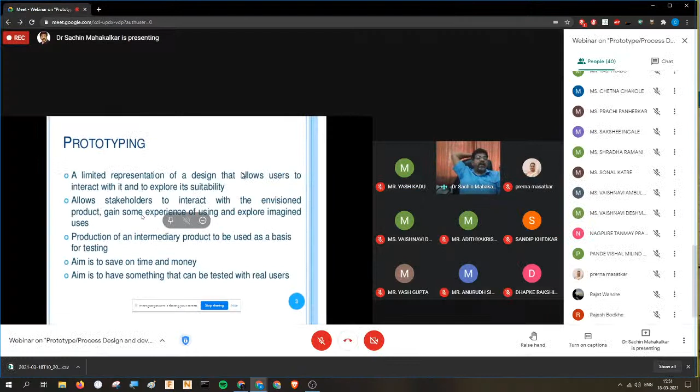Nowadays every part, even a small part directly related to inertia forces, is given an aerodynamic shape. Even the mirror, if you notice, is aerodynamic, so that it reduces inertia forces, and that's how you increase the mileage.

Nowadays only the chassis uses steel. For most other components, plastics or composite materials are used, which are very light in weight. When we use this type of material, it becomes much easier to give the aesthetic look.

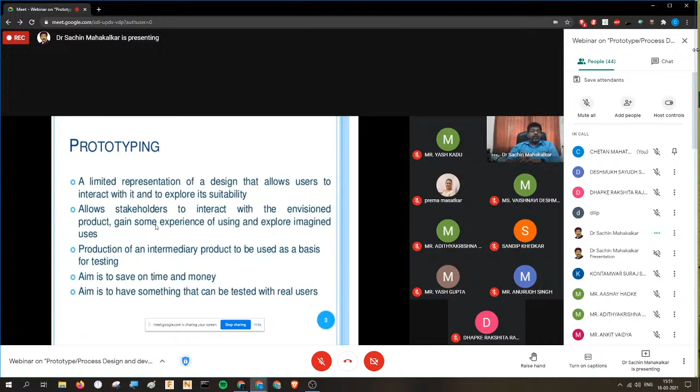That's why you find all these aerodynamic shapes being given, and new models can easily be launched one after another just by changing the aesthetic looks while the engine remains the same. So the aim is to have something that can be tested with real users - this is nothing but prototyping, as all of you know.

Now, what do you mean by prototyping? Everyone knows that wherever you go for testing, that is prototyping. You never get it right the first time. Any idea that comes up, when converted into a 3D model, will have many errors, so it will never be right at the first attempt - there will always be redesigning required.

So basically, in prototyping, you have design, then you come to the prototype, and once you go to the prototype, you evaluate it. At the evaluation stage, if feedback comes in, you go back to redesigning, then back to the prototype, and that's how your product gets a new improved version. If it's okay, the prototype can be converted into a real model which can be launched in the market.

So again, what is a prototype? It is the working model or first trial version of a new design to be tested. Feedback is very important - without feedback, you cannot say it is 100% a working model.

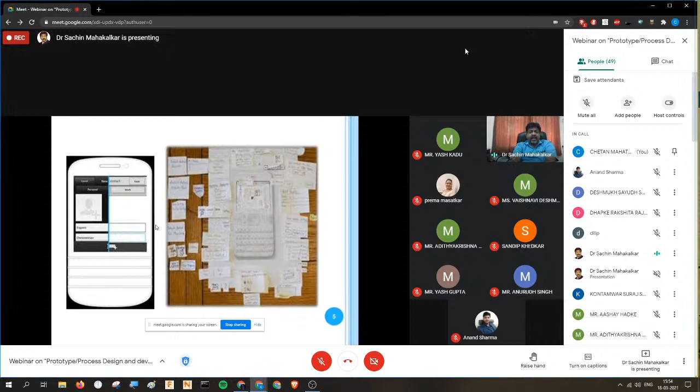What do you mean by prototype? Going into detail about types of prototypes and designing steps, in the further slides I'll cover the applications and manufacturing techniques which we will be using to prepare a prototype of a model.

So what is a prototype? In interaction design, it can be any of the following: a series of screen sketches, a storyboard that is a cartoon-like series of scenes, a PowerPoint slideshow, a video simulating the use of a system, or a piece of software with limited functionality written in the target language or another language.

Or it can be a product design, it can be any product like a small bottle, or in a pandemic, so many products related to the healthcare system.

All of you are aware that in many NITs, IITs, and institutes like YCCE, we have developed using 3D printers some valves, or maybe some components associated with ventilators, or some other healthcare systems.

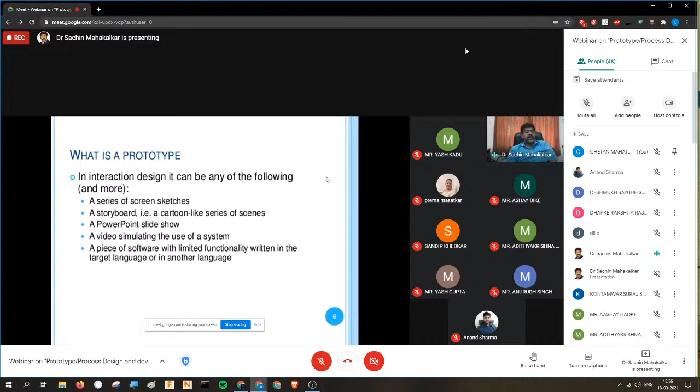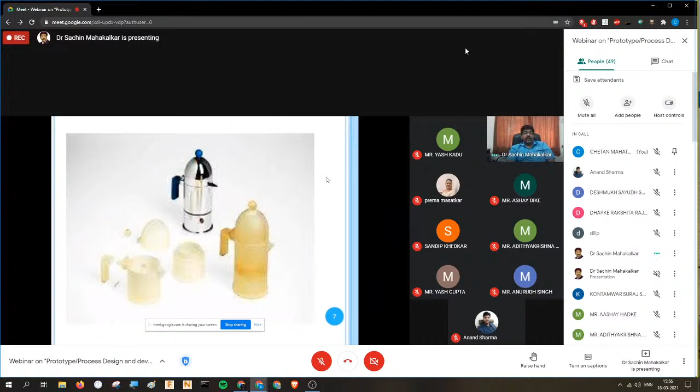So how to build a prototype: build a prototype of basic functionality, especially the interface. Test the prototype, which will uncover design errors, correct the errors - that is very important, that is a feedback system. Correct the errors, and then repeat until you have a clean design.

Even nowadays it's very easy - all of you are aware of these CAD softwares and everything. But maybe 10 years back, if you go to nearby industries like Mahindra and Mahindra, there were blueprints, as you must know. Nowadays we directly learn, you have learned AutoCAD, CAD softwares like ProE, CATIA, SolidWorks, and now you have the drawing files in your computer itself.

But 10 years down the line, we had drawings drawn on sheets, which were used by machine operators who would look at the drawing to manufacture the component. That drawing would be placed on the machine where there was oil and everything, so there used to be a blueprint of that drawing, which we called an ammonia print.

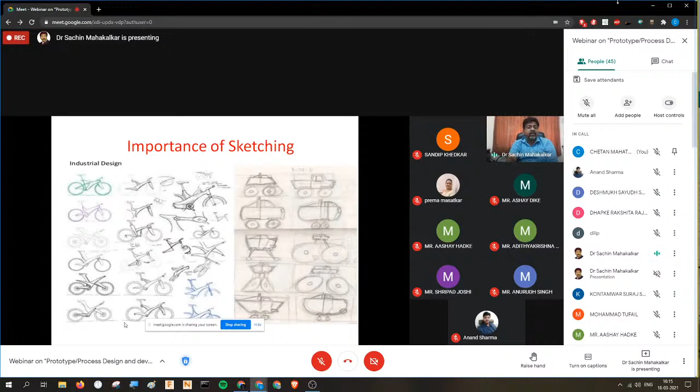So now it is not expected that a BE engineer should do the modeling. He can go for some other analysis, maybe the next version of this model. So you should be very good in modeling right in the second year itself. You should explore on your own, no need of going anywhere. Nowadays it's so user friendly that you can easily draw the 2D model, 3D model, and explore n number of softwares wherein you can convert 2D into 3D models.

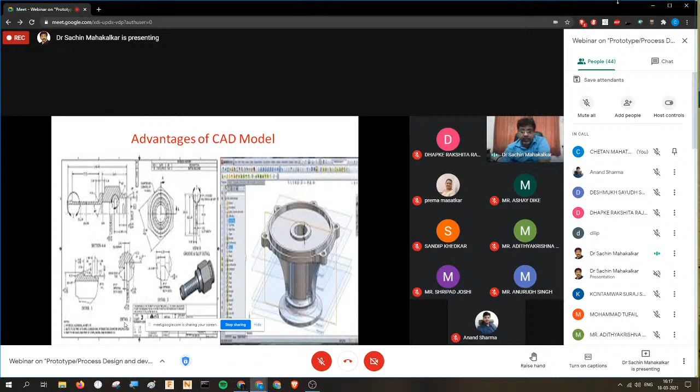So this is the advantage of a CAD model. Many softwares are available wherein you can convert a 2D AutoCAD image into a 3D model. Then, before the prototype also, you can do the analysis part. Once you come up with the product, you can carry out the analysis - all of you know the analysis, that is ANSYS.

I have seen many projects where students do the CAD model, do the FEM analysis, and then they cannot interpret it. It is a software - it will always give you two or three colors, but as an engineer you should always compare these softwares with the theoretical formulas which we have learned in strength of materials, machine design, and design of mechanical drives, wherein you can easily find out the stresses coming onto, maybe, the rod which is fixed at that bucket end.

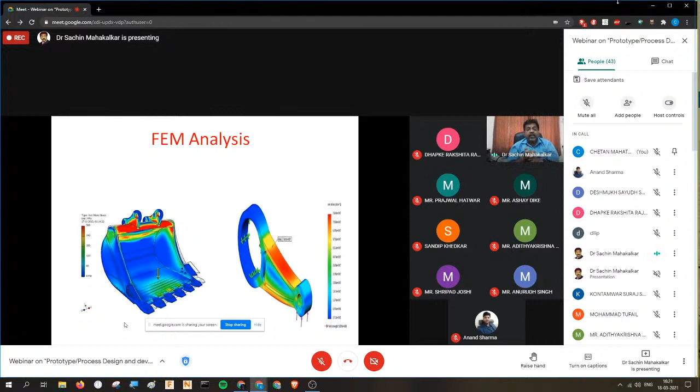So once the analysis is done, you are aware that the product, the prototype, is perfectly all right, and now we can go for manufacturing, which can be directly put into the real world. So the manufacturing technique - all of you know the CAD model can go through the CNC.

Nowadays we have what we call subtractive manufacturing, where the material is removed - that is called subtraction. And there is another one called additive manufacturing, where material is added layer by layer, which is nothing but 3D printers, which all of you have seen. We also have in our lab a 3D printer showing how layer by layer manufacturing can be done, where you add material - that's why it's called additive manufacturing. In a CNC using a lathe, drilling machine, or turning, milling - all these operations where material is removed - you have a raw material and from there you remove material. That's why it's called subtractive manufacturing.

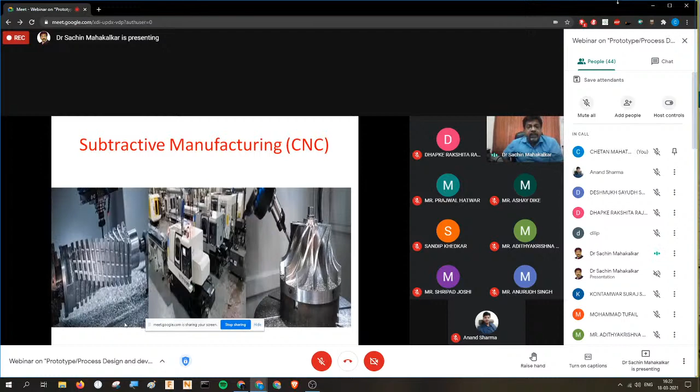As a student you should know how the CAD model is prepared, how to transfer this CAD model into the CNC machine, what type of programming it is - that is G code, M code, which you have already learned. How these codes are generated, and through the controllers, maybe the Siemens controller and Fanuc controller, the program is given to the CNC, and every tool gets operated, and you get the final product. That is what we call subtractive manufacturing.

Then this is nothing but additive manufacturing. So nowadays, using a 3D printer, any complicated part which is not easily manufactured using subtractive manufacturing can be easily manufactured using additive manufacturing. During this pandemic, you have seen that using this additive manufacturing, ventilators used for 3 or 4 patients through a different four-way valve were designed, a three-way valve was designed. Many new inventions during this period were done, especially in the healthcare system.

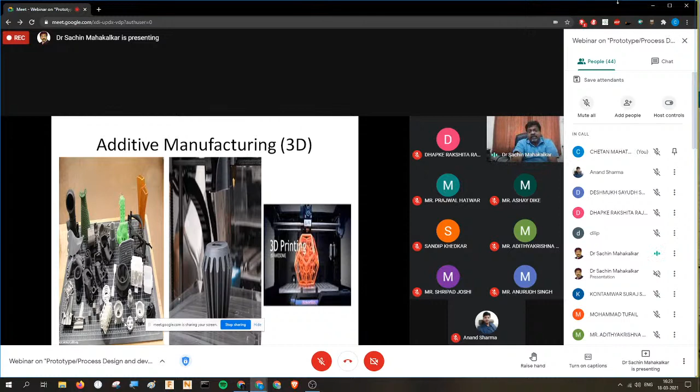So all of you know that additive manufacturing is the future - it will come. Maximum manufacturing will be done using this 3D manufacturing only.

These are the basic injection molding process components. All of you should know the injection molding process - these are the products, so many products which are manufactured using injection molding. Many of you might have seen these machines, injection molding machines.

You have plastic granules as a raw material which is poured inside the hopper, and then you have a heater, and through the heater the temperature of that raw material is increased, and then inside that box you have a die, maybe of these components which has been shown on the right hand side. All these are injection molding components.

As per the product you have to have a die, and then either using the blow blast or the pressurized way, you can blow that hot plastic granules into the die, and you can achieve these type of products where the strength is very low, but here you don't require strength. These are components like some dustbins, some furnitures, maybe many plastic components which are nowadays manufactured using the die injection molding machines.

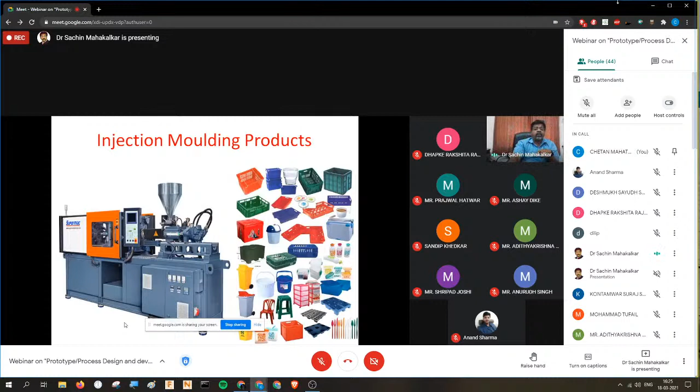These dies are very important, and all of you should know that. All these dies are designed using the CAD model only. It is basically in two halves, then only you can remove the material. Otherwise if it is in one part only, you cannot remove it. The first one is the rubber hot water mold.

All of you have seen that whenever there is a swelling or anything on the body, we normally use this rubber hot water mold. We insert the water mold, then tighten it, and place it on the portion where there is a swelling, so that it gets reduced. That is again in two halves which can be easily removed.

The second one is the die for the Bisleri or mineral water bottle, wherein again it is in two parts. So through the hot pressurized process, plastic granules will be blown off and come into this die, and that's how the bottles are manufactured. So many components, thousands of components are manufactured using this injection molding process.

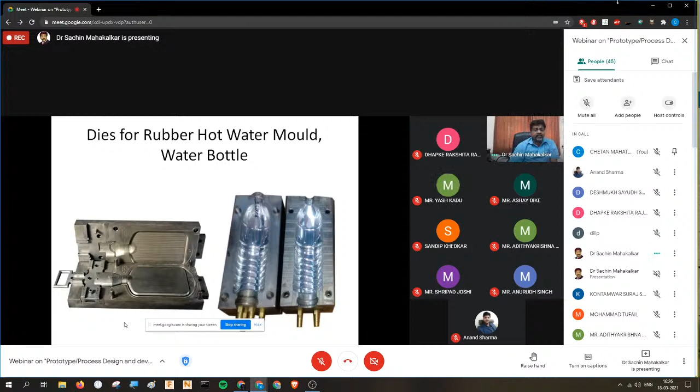So this is again what I wanted to tell you. The second process, which all of you know, is casting, which is again used for mass manufacturing. Once you come up with a prototype and now want to launch the product, it can be done using casting - sand casting or metal casting.

Like the industry, the biggest casting we have in India is in Butibori - NECO casting. It is one of the biggest castings in India. They are casting the drainage slabs and all these things. So many products they are casting.

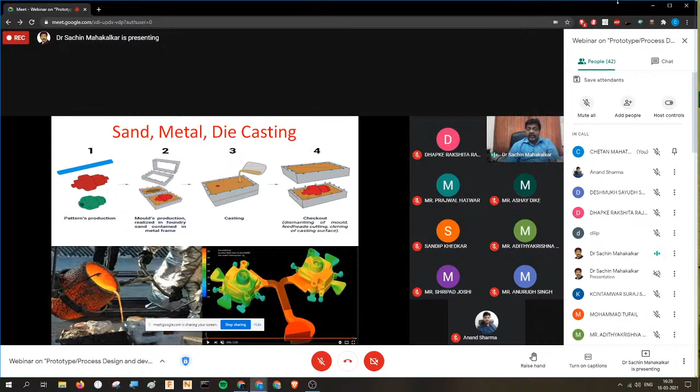Casting is also one of the major processes. You have learned casting in your manufacturing process one and two - machining process, the different defects used in castings, and so many important things.

Then another manufacturing technique, once your prototype is designed, is press working. So many products are manufactured using this technique, which is called press working. So manual press, like the best example is the punching, like a punching machine.

All of you have used the punching machine where you apply manual force just to cut two holes on a plain paper. Similarly, there can be machine press, and the tonnage can vary from 1 ton to 1,000 tons.

So many huge presses are available wherein you can manufacture the component. Tonnage capacity depends upon what component you want to manufacture. You cannot have a 100-ton press and then only manufacture a small component - that will be wastage of electricity, wastage of machine, and cost. So tonnage depends upon what product you want to press.

The raw material used for press working is sheet metal. Anything with thickness less than 5 comes under sheet metal, and anything with thickness greater than 5 comes under plate. So sheet metals are basically the raw materials used in the press working machine.

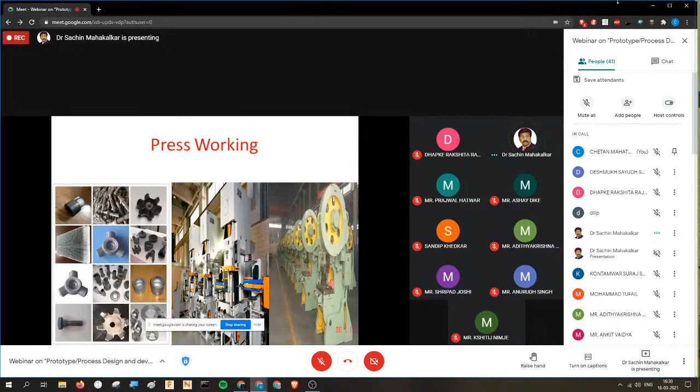You can see the press working machines, the third one is based on the flywheel, and these are the pneumatic or hydraulic press working machines. The first image shows different products manufactured using press working, like LPG cylinders which we use - they are examples of press working.

Then this is another important process which all of you know, the hot rolling and cold rolling. The hot rolled sheets are passed through rollers, and the thickness keeps reducing until it comes to the final sheets which are rolled or coiled. That is hot rolling.

Then you have cold rolling. Cold sheets are again passed through different rollers and squeezed, and that's how the thickness is reduced. So these are the two - you have cold rolling plants and hot rolling plants.

In Amravati Road, you have JSW, that is Jindal Steel, where they are the largest manufacturers. The sheets, maximum sheets which you purchase for roof purposes, you will find are manufactured by JSW only, that is Jindal Steel JSW.

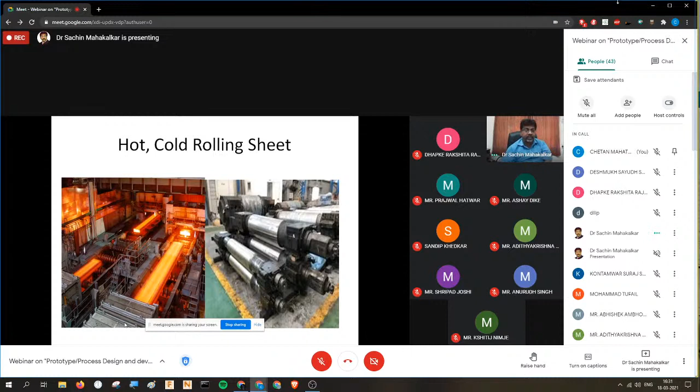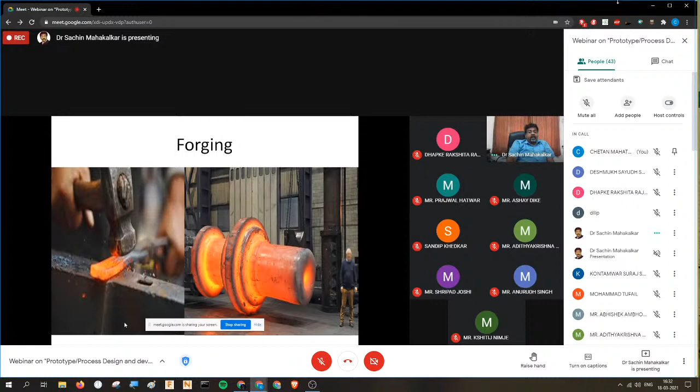You can see the first one where he is applying hammer and putting some force on it.

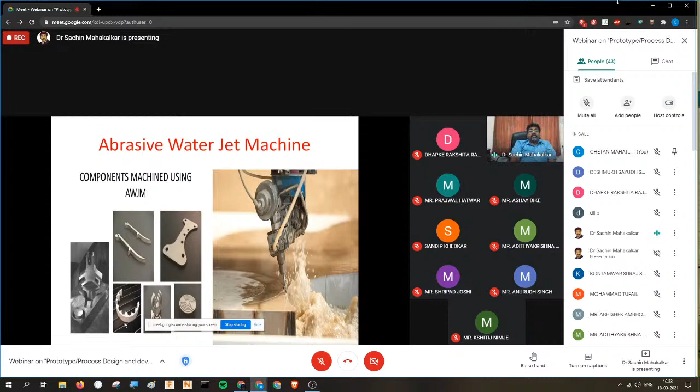Nowadays, holding a phone for 2 to 3 hours is very challenging. So can we have any other arrangement? Nowadays on the road, I have seen some product where you can put a phone horizontal and see a big screen type like a TV screen on that mobile phone. Such innovative products can always be thought of, and as a student you should always go for converting that innovative idea into a product.

Yes, any other questions?

Filing patents, and nowadays commercialization of patent is a very necessary part or very important factor that we have considered.

Yes, now we have taken a lot of initiatives, but we found that in the current scenario, product development plays a very important role, because there are number of ideas which appear in the minds of students and faculties, but that idea doesn't reach, or they are unable to reach the product level, and that's why the patent is not having that kind of weightage related to commercialization. So whatever content you presented in today's webinar, sir, it will definitely help students as well as faculties to lead innovative ideas towards a successful product which will be considered for commercialization. I'm really thankful to you once again.